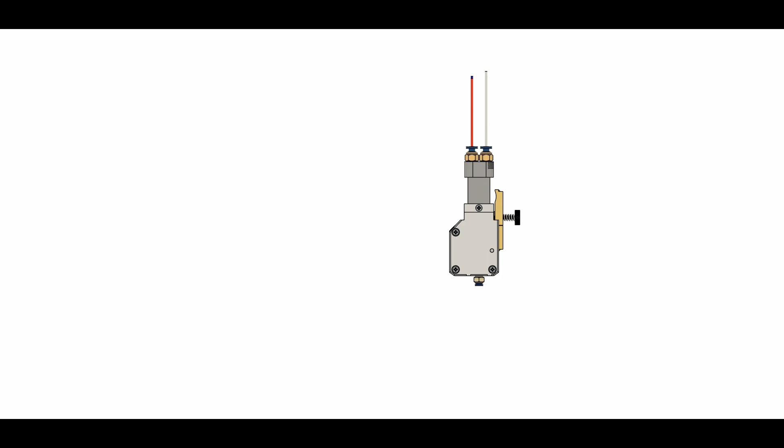Today I am open sourcing one of my earlier engineering projects, a custom designed multicolor BMG extruder for an FDM 3D printer, originally designed for the ARC M1 printer for ARC laser for multicolor printing. It can print 4 colors simultaneously. If attached with the AMS unit, it can print 6, 12 or 18 colors.

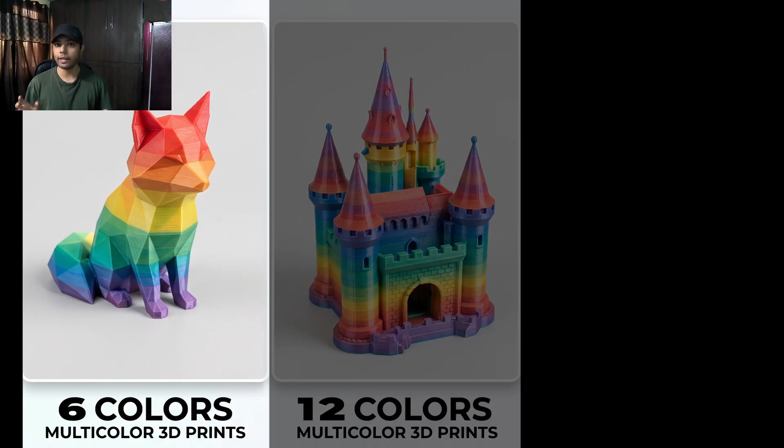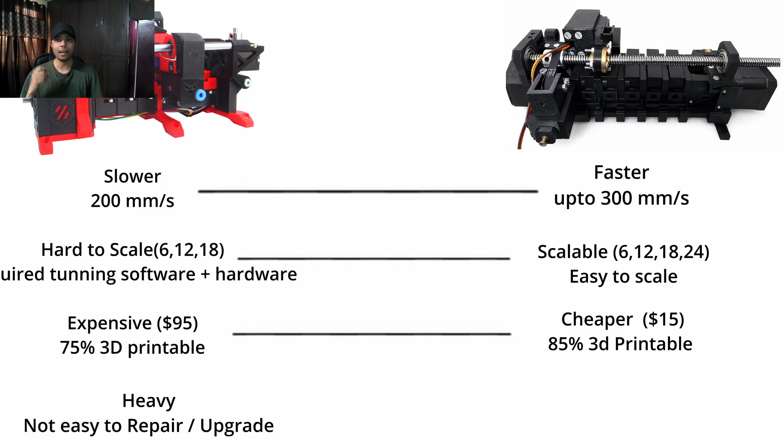Look, here is the AMS unit, and it's better than the Index Rapid. It is faster, more scalable, cheaper. 85% of the AMS unit can be 3D printed and lasts, easy to maintain. Let's look at its working. This is the original AMS unit that I developed. Let's see how it works.

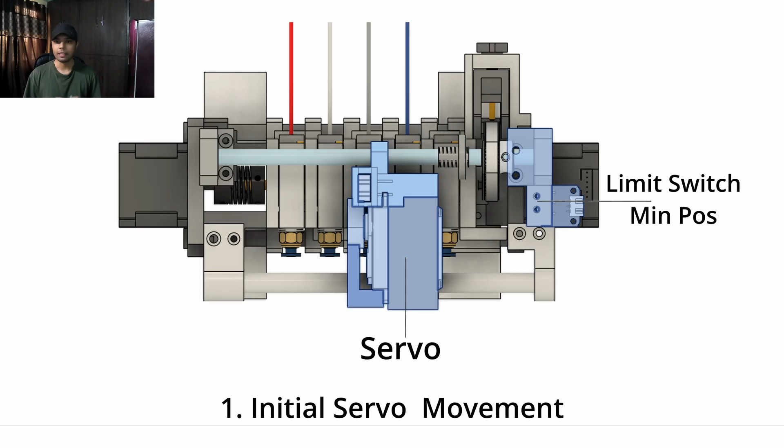Initial servo homing. The process begins by homing the servo to establish its minimum reference position. Gantry movement. The gantry moves directly to the coordinate of the requested color. Precise axis homing. Upon arrival, the axis homes against the physical end stop to establish the exact minimum position.

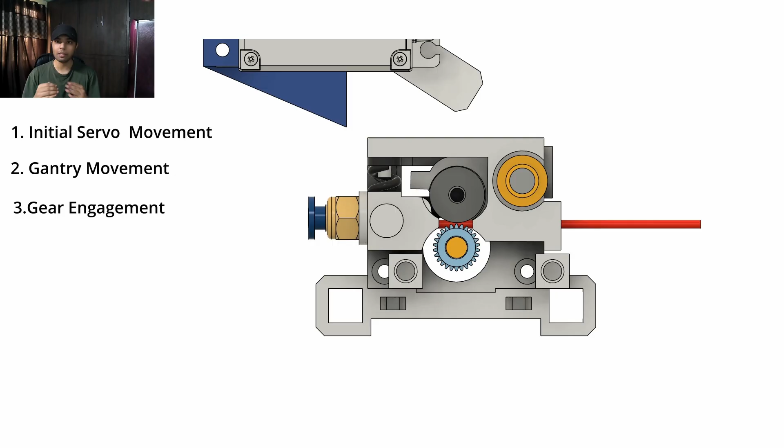Gear engagement. The servo advances 80 degrees to push the gear assembly in, mechanically locking it with the main shaft. Rotor rotation. The main rotor rotates in precise 150 degree steps to line up the selected lane. This is how it works.

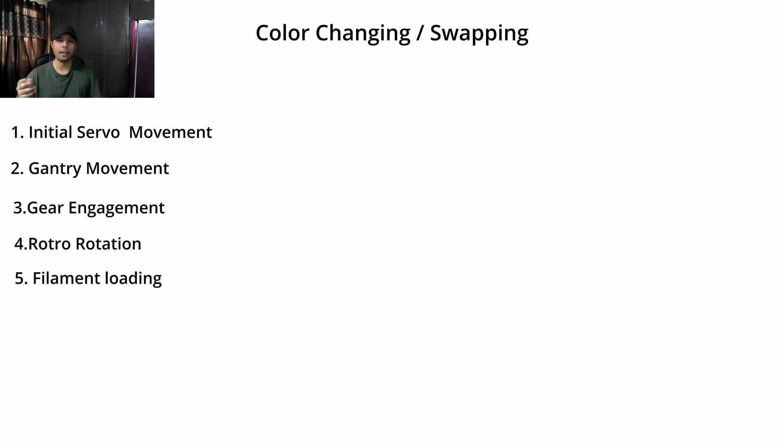Filament loading. The system feeds the filament into the extruder, which grabs the strand and pushes it directly down into the hot end. If another color is desired, say white, then this occurs: filament unloading, rotor rotation, gear disengagement, axis homing, gantry movement.

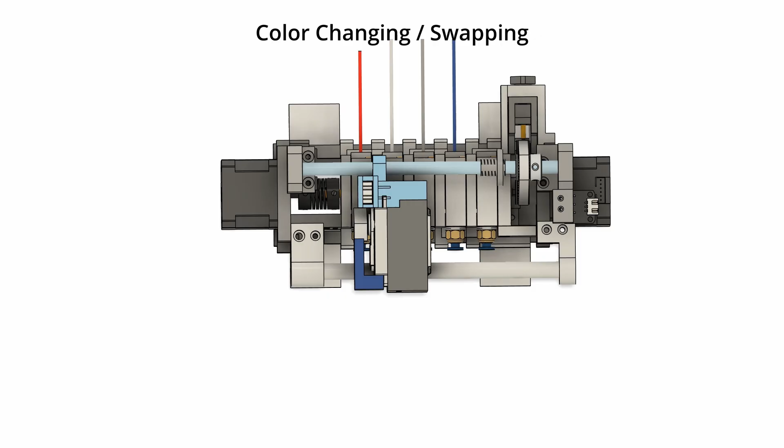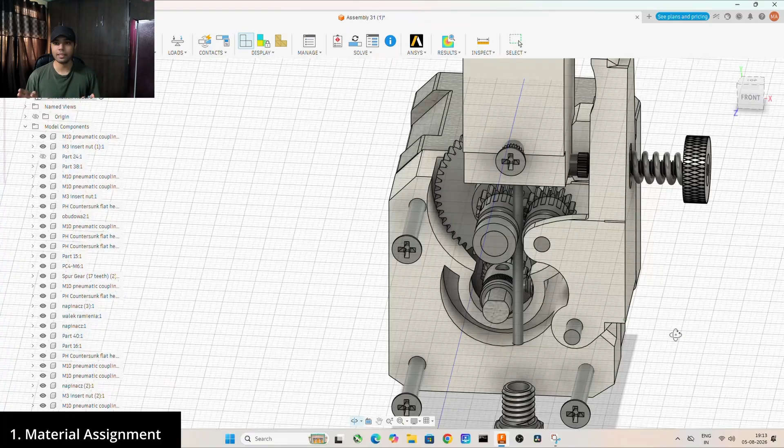Let's look at the material assignment, thermal analysis, stress analysis, and electronic circuit. All the gantry can be 3D printed, so anyone can 3D print this. Here is a detailed diagram with the name of every part, so you can easily build.

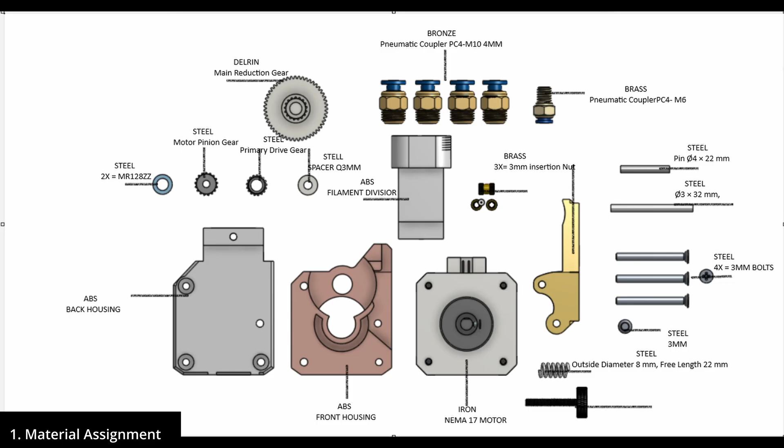First, generate mesh for thermal analysis. I am choosing the motor as a heat source, temperature at 70 C, and surrounding temperature is 28 C. For convection, use faces front and back at surrounding temperature 28 C. Contact detection tolerance is 0.10 millimeter.

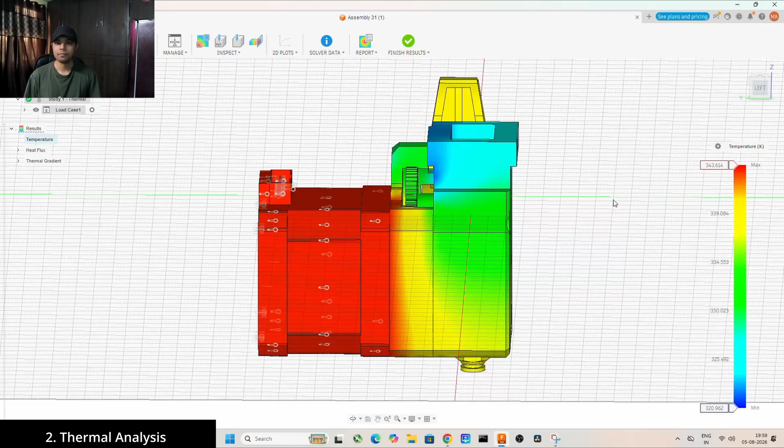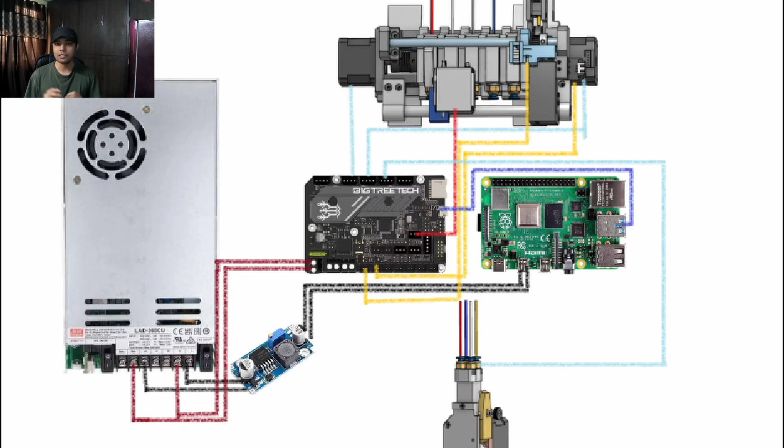Its two motors are connected to the X and the Y motor ports, and its two end stops are connected to the X and Y end stop ports. The extra motor is connected to the Z motor port on the BigTreeTech board. Finally, connect the Raspberry Pi to the BigTreeTech board with a USB cable. This USB connection is used for data communication only.

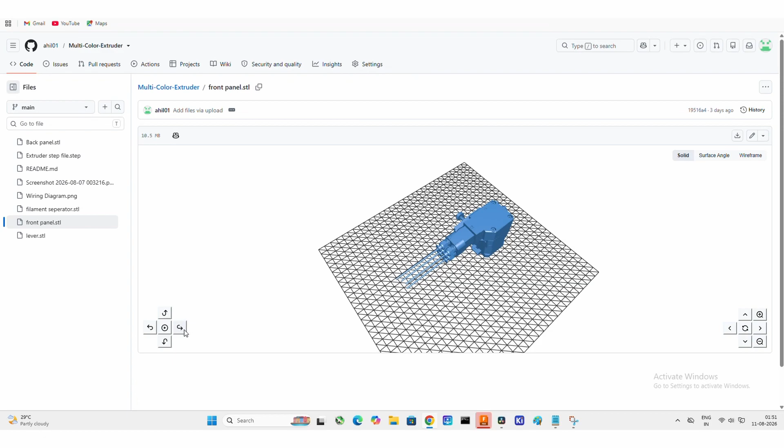To make this project easy to reproduce, I will be releasing all the design resources, including the complete CAD files, STL files, printable G-code, 2D engineering drawings, assembly files, and recommended print settings. Whether you are a student, maker, or a mechanical design engineer, you are free to download the files, study the design, improve it, or adapt it to your own printer. Here's the AMS unit, and this is the gear mechanism.